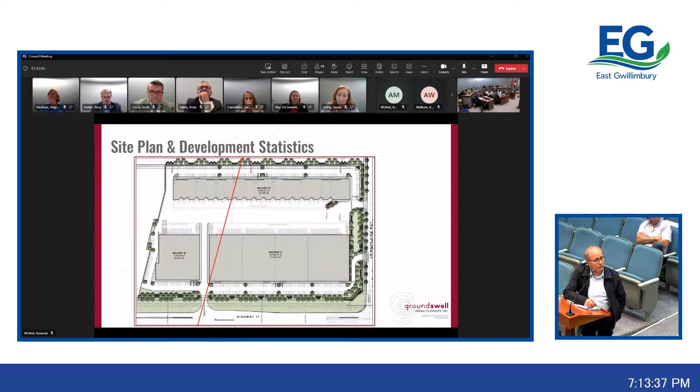If I can go back to the site plan, I do want to draw your attention to some of the critical aspects that we touched upon, actually the next one to this one, which I think are rather important, and that we've often come across as discussions when we're master planning a site of this nature. So if I can draw your attention to the screen.

Noor described the overall components of the overall site, and some of the things that are critical here: the buildings are all outward looking, meaning that from a passerby, nobody really sees the messy parts of the site. So all the internal noise-generated activities are buffered by the rear building and also the front buildings. As people are making their way into the subdivision, we've created a tremendous amount of buffer to hide whatever happens internally between the buildings.

Secondly, the access from a vehicular perspective in terms of servicing will be elaborated a little next to this discussion: the new signalized intersection, which basically brings the trucks and all the garbage removal, etc., internal from the buildings, essentially from that new access point, which is actually a very, very plus factor.

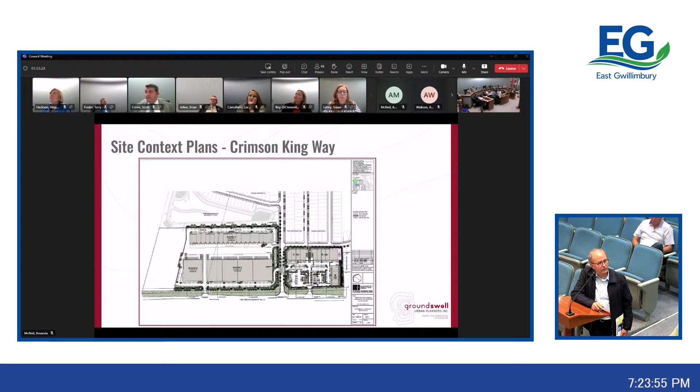Thank you, Madam Mayor and members of council. Let's walk through the commercial site. What I want to do is simply offer some of the experiences. If we go back to the large site plan, the one before this one, there are things here that will always be important in terms of respecting the neighborhood and the residential.

With this plan, we've positioned the buildings so that we use them as a buffer between what typically are the obnoxious areas, the areas that would generate noise and lighting, and fronted buildings that would respect the residential across the street. The garbage and servicing will all happen internal to the site, so it's not facing the residential, which is very important.

All the circulation is off of Highway 11 or Crimson King. There is absolutely no access other than pedestrian walkways, so anybody in the neighborhood who wants to go to the convenience plaza can walk between the buildings. We've got a walkway coming through here, good pedestrian access, which will make it very functional and very attractive.

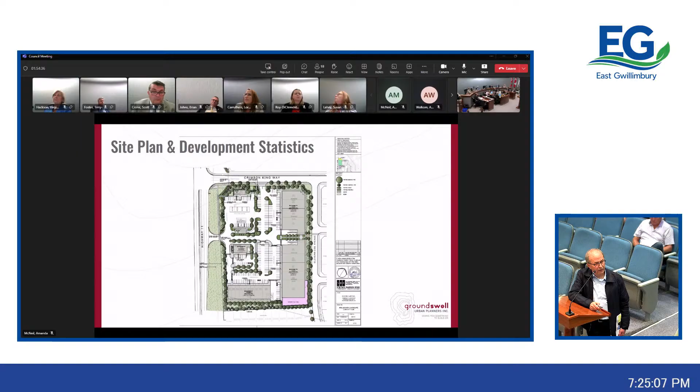If we can go to the 3D illustrations, this is the view that the residents will be looking at. We've carefully not put any signage or lighting that would become too loud facing the residential, so lots of articulation. We've used brick and stone to heighten the quality of the buildings so it doesn't look like a plaza that came out of nowhere.

If you go to the next slide, the portion that faces Yonge Street, or Crimson King as you come into the subdivision, you can see the articulation with the signage and landscaping, trying to make it as warm and as welcoming as we can.

Some of the other things that often come up are garbage and how it's handled in plazas of this nature. It's all internal within the building, so the tenants will put it in a garbage room, and then the garbage is privately picked up and removed from the site. That's basically all I would like to explain at this point. Thank you.

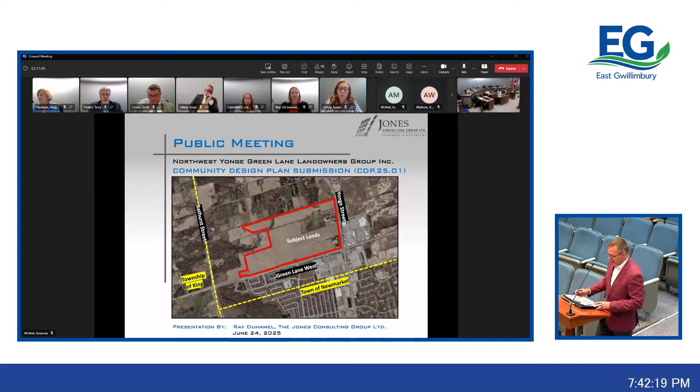Of all of them, as you can see, Beechway Developments is at the north, at the top end of the plan. There's Northmarket Holdings, there's Yonge Green Lane GP Inc., which is the Rice Group, and then there's Sundial Homes. In addition, we've planned for and included within the overall area, although they're non-participants, an existing church and a small property at the intersection of Yonge and Green Lane.

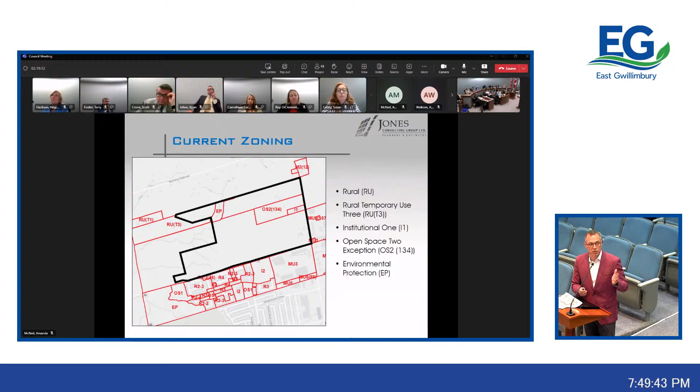So if you go to the next slide, which is just zoning, I put that in because it's consecutive with your official plans. There would be individual zoning applications for all of these lands because they're just basically zoned rural, open space, and institutional right now.

So next slide. This is the work that has culminated from the many years of working through this file ever since 2013. Again, Yonge Street and Green Lane West. What we have is the dashed lines representing the individual ownerships, which I've explained previously. And then we have a series of collector roads, one that travels east-west and comes out to Green Lane. We also have an east-west major collector road at the top end of the plan that'll ultimately connect to Bathurst. And then we have a north-south collector road here and another north-south collector road here. So those are the road connections.

And we've gone beyond just conceptually showing them on the plan. We've had an Ontario Land Surveyor go out and survey the actual intersections, make sure that those alignments are properly aligned and work. And then we've gone through that to the stage of laying out the individual land uses.

So if you can see these colors of brown and yellow and orange, those are more your ground-oriented housing, reflecting your single detached dwellings, your townhouse dwellings, and your back-to-back dwellings. You'll see up in the top left-hand corner, the singles - there's a broad mixture of uses in this area with townhouses, back-to-backs, and singles. And then you have a medium density block here.

And then outside of the plan area, because infrastructure is allowed in the Greenbelt plan, we have half of a stormwater pond and a full storm pond and a pumping station. And then the real key focus point of the Northwest Green Lane Secondary Plan is its relationship to Yonge Street.

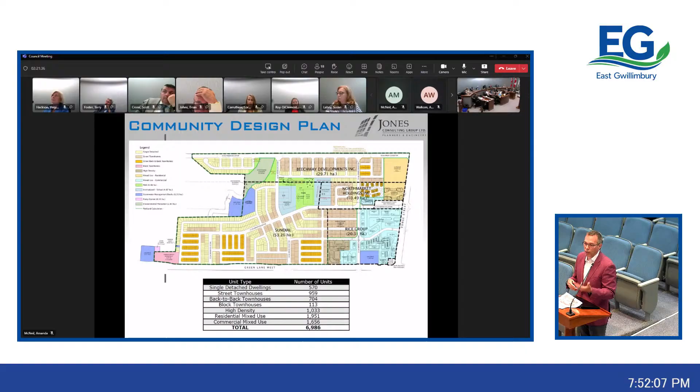So that's what the mixed use area here is. The bigger area to the south here is primarily commercial with high density residential, so that's where you're getting ground floor commercial and taller buildings built above that. That's where you're getting everything from hotels to a variety of service commercial uses and other retail-based commercial uses.

And then there's a storm pond. By virtue, we prefer not to go there, but the water has to flow the way the water has to flow. So that's where that storm pond is. And then we have some higher density uses that are basically designed to co-link in with the commercial mixed use area. This is the overall number - it's just under 7,000 units.

That's a lot, and it's designed heavy on the unit count in the area where your master planning and secondary plan was looking for it. You want higher densities built along Yonge Street. That's how this plan is designed, and your ground-oriented development is in behind.

You're looking at a mixture, roughly based on this community design plan, of about 35% ground-oriented development, and about 65% higher density development.

Again, with the community design plan, there's going to be a lot of individual applications, and revisions to the actual internal layout of those mixed-use areas. It's more conceptual now because the community design plan is trying to make sure that it works.

Does the traffic work? Does the sewage work? Does the stormwater management work? We need to, at the community design stage, make sure that we can plan for those ultimate unit counts. They may not be developed exactly at that high a density, but there are parameters within your official plan which have to be adhered to, and there'll be a series of individual site plan applications along that area that will ultimately see it developed.

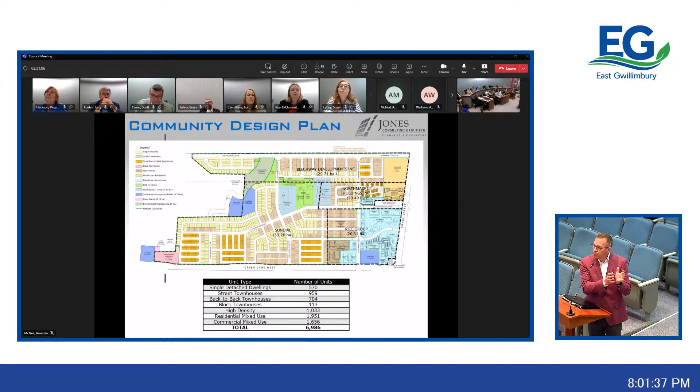The actual design and physical site plan application can't come until we're well past this stage - the servicing has been sorted out - and then they may come in with a block subdivision plan. They may come in with a site plan, but there's a lot of development proposed, and it's going to take a period of time to deliver on that. But it's not just 7,000 residential units - a lot of this is commercial and residential mixed use.

So you've got commercial on the ground floor and residential above. There's market conditions, financing, a whole lot of considerations that are ultimately going to form this generational plan over its life cycle. What we're trying to accomplish today is presenting what we think the intent of your previous councils was, if you were on them, what you intended when you developed the secondary plan, and how that manifests into the actual details on a master plan. That way we can set the table so everyone can move forward when servicing individual applications, so you don't receive a subdivision application and ask why the broader area wasn't considered. That's why we're here now, and I think it's a really useful time to have these conversations.

So hopefully that answers your questions. It certainly does help. Thank you for reassuring me.

I guess ultimately, when I look at these plans, I look to see that there's a vision, that there's placemaking happening, that there's something unusual and special and unique about each neighborhood we're creating, because this is essentially a neighborhood. I'm not seeing a great deal of vision from that perspective. Now that you've explained what's happening in the light blue quadrant, that's good, because it matches what my understanding was back in 2000-something. But just for me, I look at this and wonder, is there a roundabout? This doesn't look like a very big park.

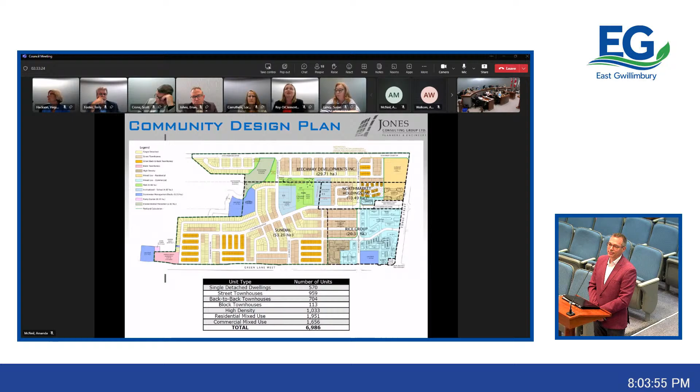Obviously those happen at the site plan or subdivision level of things, but at the higher level, at the community design plan, I want to see something that's inspiring. For me, this is partly inspiring, but not greatly inspiring. Thank you for allowing me to speak, Madam Mayor.

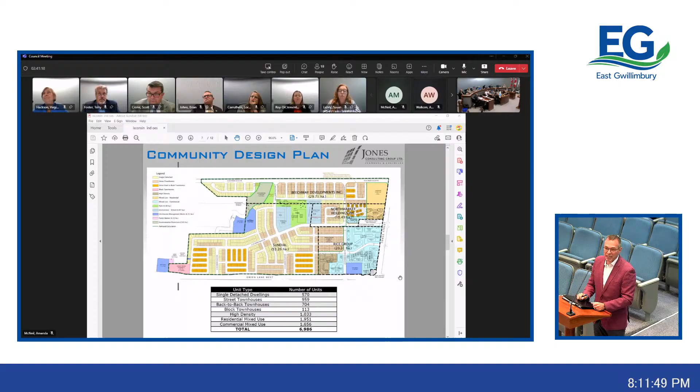So if I might, Madam Mayor, and again, you're in the business, I'm not, but I would suggest that if there's any way to move forward with moving it onto your own property, on Beechway's property there, and building a road that would support it to move there - a road you're going to leave there anyway - might be a way around it. But again, I'm talking through my hat here. I'll just leave it to you. But we would certainly like to see something happen.

I think that's designated also, if I remember right. It is, correct. It would be a shame if it sat there too much longer. Understood, we'll take it away.

Absolutely. Councillor Roy DiClemente, just to add to that - our community had plans. There was another landowner who had responsibility for a heritage home, and they were going to move it from Second Concession and Green Lane to this location, coming up Second Concession along Mount Albert Road and down Leslie Street.

A predecessor of Mr. Brake here once said that anything can be engineered, so where there's a will, there's a way. And your client - I'm assuming your client is the landowner - has a responsibility to this community to make sure that that piece of our heritage is protected. So unfortunately, he's going to have to do what he needs to do sooner rather than later, because the structure simply can't wait. Thank you.

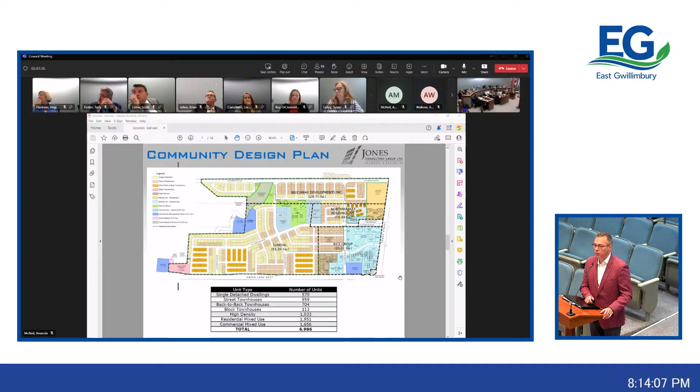Through your worship to Councillor Johns, is this the area you're speaking to here? Yeah, so this is within the green belt here. If you could go back to maybe the second slide, you can see the aerial photograph - this is the area that exceeds outside that area right here. So this is effectively the environmental system in here, so that's a walkable area potentially.

And then my other comment was about cash in lieu of parkland - the municipality can use that where they deem fit, as well as amenity spaces that would be constructed as part of those individual development applications.

Thank you. Through you, Madam Mayor, if it would be allowed to ask some follow-up. So recognizing the boundaries that are existing sitting there, does the ownership of those lands extend down beyond the boundary lines? It does. So is there a plan to leverage the opportunity of that green space with tree planting initiatives or trail projects or opportunities to utilize that? Is that integrated, or...

Sorry, I'm tired too.

Through you, Madam Mayor, to Councillor Johns, a takeaway: we haven't created a master trails plan, but I'm hearing what you're saying, and the comments from Councillor Carruthers about the parkland, so we'll take that away as additional working items to see what our responses are, working with staff on those points. Thank you.

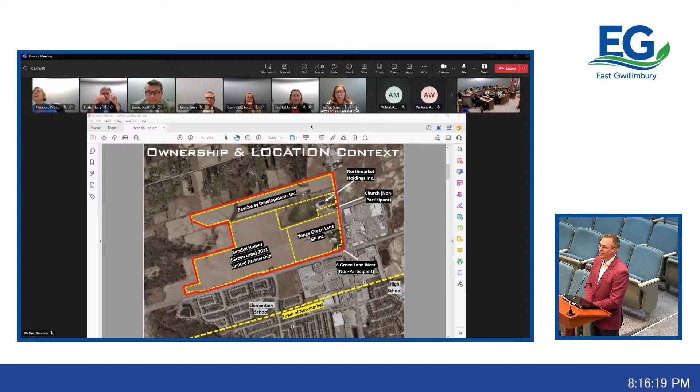Thank you very much. So now you understand we have a council that is passionate about older homes and large lots. I would hope that after this meeting there's an opportunity for perhaps a couple of us to sit down with you and talk about the kinds of things that drive us every day - homes that are 100+ years old, gardens still growing vegetables planted 20 years ago. It makes a difference in a municipality like East Gwillimbury. We're not the same, and those are some of the things we cherish as time goes on.

Thank you very much for taking the time to listen to us. Thank you. Now, I think we had someone else who wanted to speak. Am I correct? No. Yes.

Do we have any registered speakers for this application? Through you, Madam Mayor, we have not received anyone who has registered. Perhaps we can ask if members of the audience have any comments they would like to provide.

You've all been here for quite some time, so you know how the process works. If you'd like to come up and say a few words, we'd be pleased to hear from you. New subdivisions coming into our community make changes many times - most of the time they're very good, but sometimes not quite as good as we had hoped. So if you have the idea of coming and speaking, or if you want to put pen to paper and share it with us in written form, we'd certainly be glad to get back to you as well.